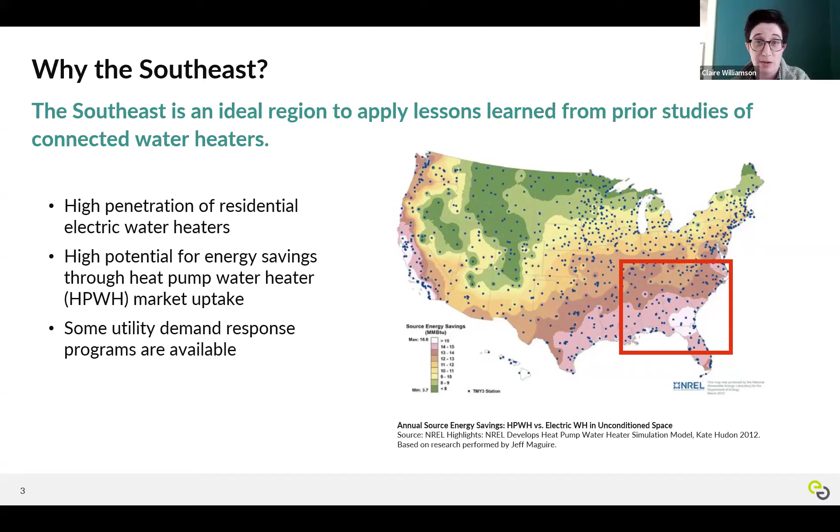Looking at demand, not just energy savings, but demand savings for heat pump water heaters, there were a couple of studies that have happened before. You can go to the next slide as well, Daniela. Really, there's two: one from 2018, where the Pacific Northwest National Laboratory did a pretty large scale connected heat pump water heater study. And then there was one in Florida as well in 2022 that did both the lab and the field testing.

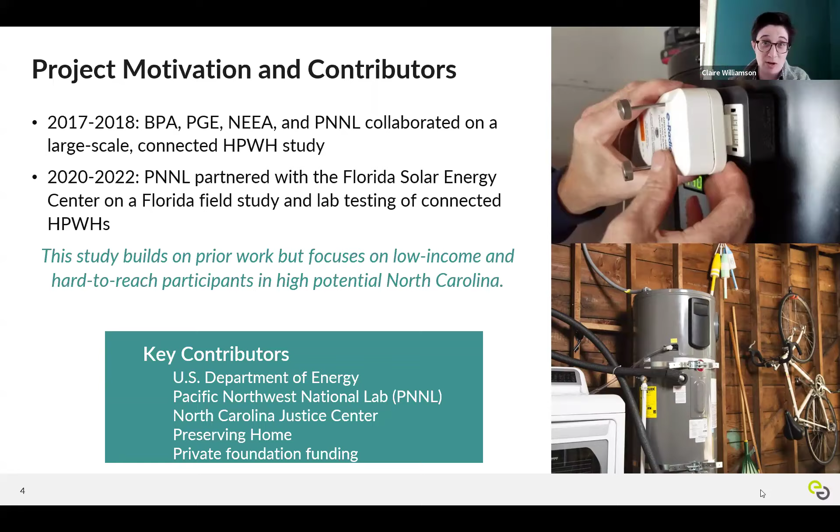And so we wanted to do field testing specifically focused on low income, harder to reach participants, to understand what are the barriers to making this, which could be a large potential of demand savings, and what would it take to have a program like that. So you can go to the next slide. The idea for this program started with my project director, Al Ripley, talking to Chris Granda, who's at Energy Solutions, years ago at a conference.

And a couple of things came together to make it possible. One factor in place is that the Justice Center had been working with a network of home repair and housing agencies in our local community in Orange County, which is in central North Carolina. And there was a great organization, and they're now called Preserving Home. At the time, they were known as Rebuilding Together of the Triangle. And they ran a collaborative where people got homes basically weatherization ready. So we had some connections for people who do that work.

Also, this program really got started during COVID, when there were some of the recovery dollars, and the state energy office in North Carolina was like, how do we spend large amounts of money fast that's going to have energy savings? They really wanted to have energy efficiency, energy savings. And we pitched them on the idea of directly paying for heat pump water heaters, like direct installs. So we got the funding for the purchase of the equipment in people's homes and could provide these heat pump water heaters to households at no cost to them. So that was really, really important.

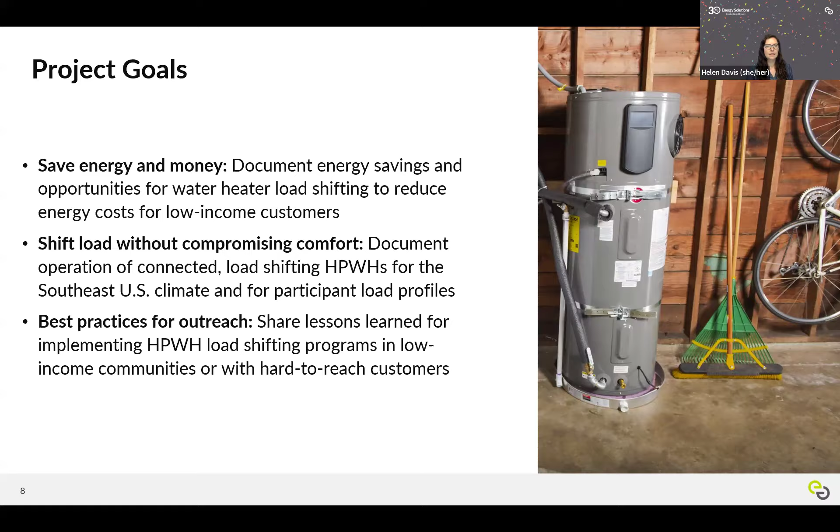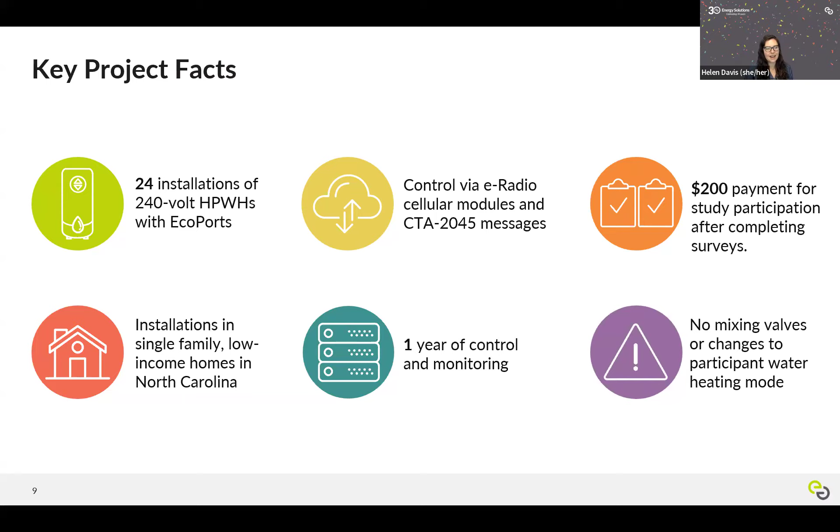So we were also surprised that about half the homes had gas water heaters prior to the study. As Claire noted, most of this area has a lot of electric water heating, so we expected more of that, but it was cool to be part of some fuel switching there. We had almost all 50-gallon tanks, one 80-gallon tank.

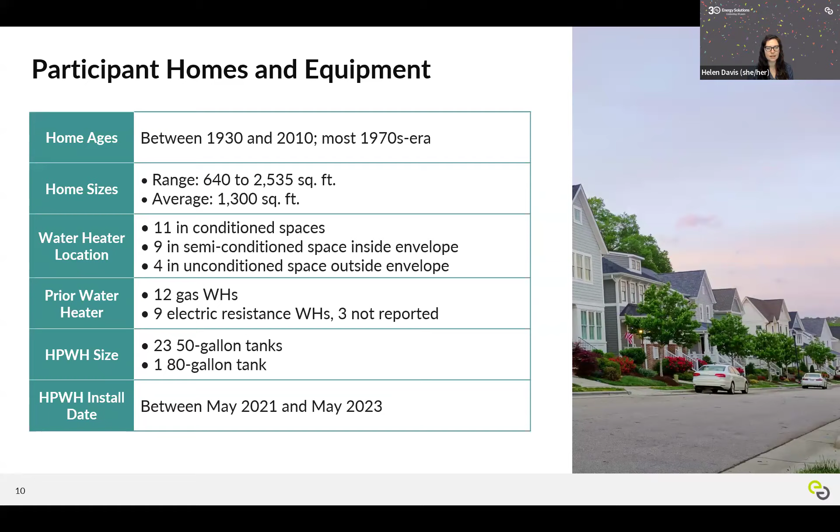And the water heaters were installed by formerly Rebuilding Together of the Triangle over a 2-year period. So from mid 2021, then we started the study in mid 2023, and some participants had just received their water heater, others had had it for a couple of years, so had seen some bill savings and that kind of thing. Next slide.

Throughout the year that we were monitoring, there were several of the homes that had a change in occupancy, which supports the need to oversize, make sure you're sizing correctly, because the occupancy can change, and increasing occupancy can really hinder the ability to load shift without impacting the hot water supply. So next slide.

So this is kind of the highlights of recruiting. This is my last slide before I'm going to hand it over to Daniela to talk about the actual data. So Preserving Home was really well known. They had provided free heat pump water heaters to this pool of folks that we reached out to participate in the study, and everyone was really happy with them. Many of the participants had seen a bill savings. So the recruiting was definitely a little easier with that warm intro, much easier than it would have been for cold calling these homes.

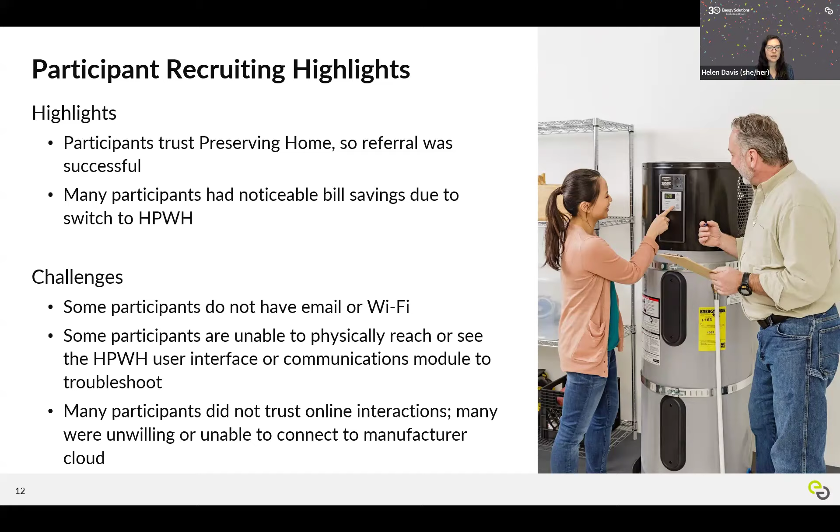And we had hoped to use the manufacturer's cloud as sort of a second check for the e-radio modules, but most participants were not willing to download the app. They didn't trust that kind of online interaction. Some of them didn't have smartphones. So we were only able to do that for a couple, and it wasn't as useful as we thought it could be. So we did learn a lot through this study about the best practices of reaching this population. Definitely mail is going to be a thing still, and it's just not as quick as it can be with the younger population that's constantly on phones and email. So Daniela is going to talk about the load shifting design and results.

Yeah, all right, thanks, Helen. Thank you. I'm gonna talk about some of the results from the study. As Helen mentioned, one of the goals was to demonstrate how the demand management features of these connected water heaters can provide additional benefits for low-income customers and the grid in the Southeast. And this would be in addition to those energy efficiency savings that customers would get from switching from a standard electric water heater, for example, to a heat pump water heater.

So this section is about how we designed the load shifting aspect of this study to achieve some of those goals and what we learned. And if you're not familiar with the term load shifting, that just means shifting a customer's energy demand or load from one part of the day to another part of the day when electricity is cheaper or when there are more electricity resources available on the grid.

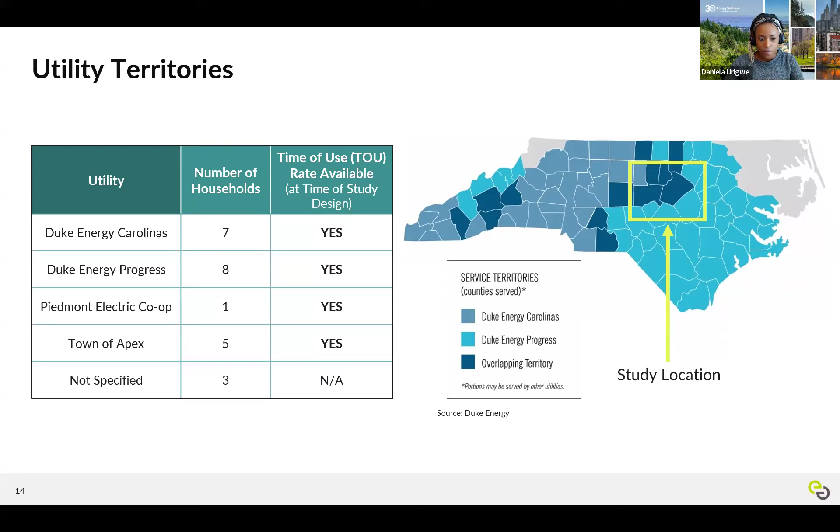And it is challenging to reduce the energy demand for such a long period of time for water heating, because that would mean that you have to hold off heating water for that time period. And if you have a lot of hot water use, you might have to recover the heating at some point in that window.

But as mentioned, the majority of our participants were seniors with only 1 to 2 occupants per household. And because of their overall small and infrequent water use, they were a little bit more flexible about when they would need to heat water compared to what other demographics would have. And they just didn't have to heat water that often, which was an interesting finding of this study. So that actually made this demographic uniquely well suited to defer their water heating for a long period of time in alignment with these peak periods.

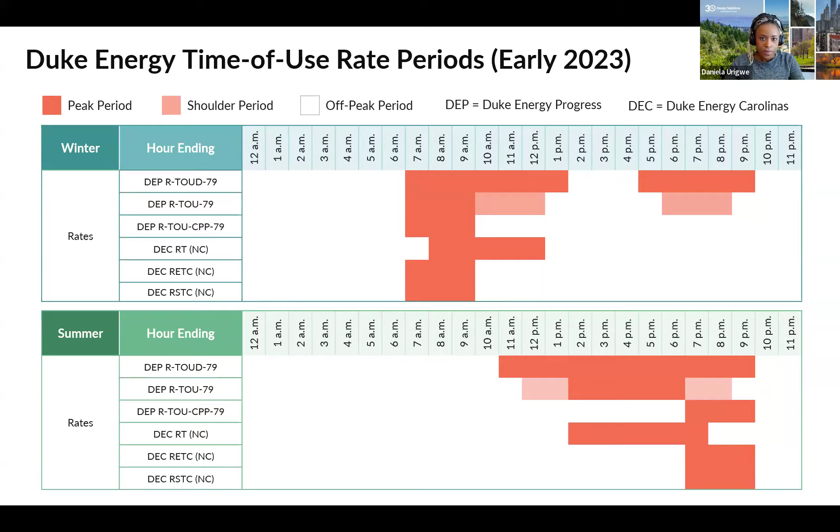And we made some simplifications as well. So for example, Duke Energy Progress and Carolinas had a slightly different definition of the summer versus winter months. We decided to use the same definitions for all of the participants to keep them all on the same schedule and collect the most robust data. So even though the participants were on some of the different rates, we kept everybody on one schedule.

So we had our summer season as May through September, and the winter season as October through April. And then we split those into cold and shoulder for the winter, hot and shoulder for the summer, to kind of differentiate the results a little more. We also used the findings from the PNNL heat pump water heater load shifting studies to inform the length of the signals, the strategies for different weather conditions, and the specific signals that were used for load shifting.

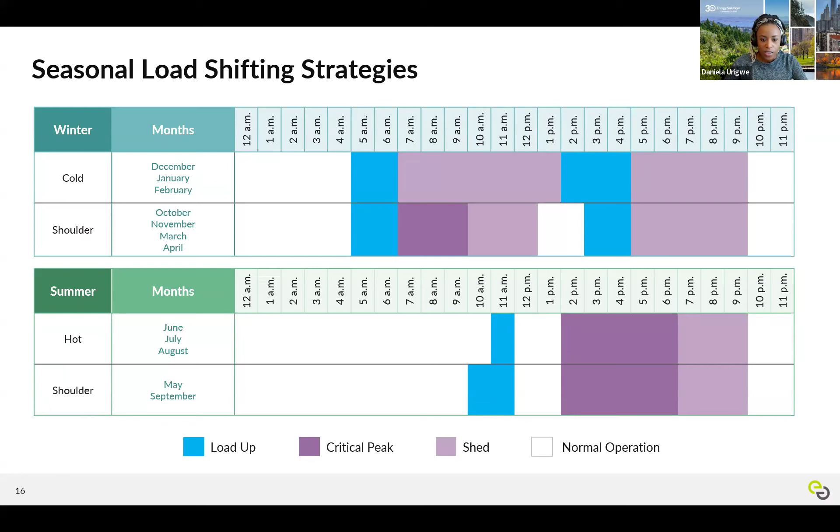So for those 4 different seasons I mentioned earlier, there are some obvious trends, like the colder it was, the more baseline energy use there was. So the colder it is, the more energy the hot water heater needs to heat the water. So therefore, because there's more baseline energy use, there's also more energy available to be shifted. Another aspect you'll see here is, like I mentioned, in the summer, we only did one long shed between 1 and 9 p.m. In the winter, we did a morning and an evening one. So there's a little bit of different results there.

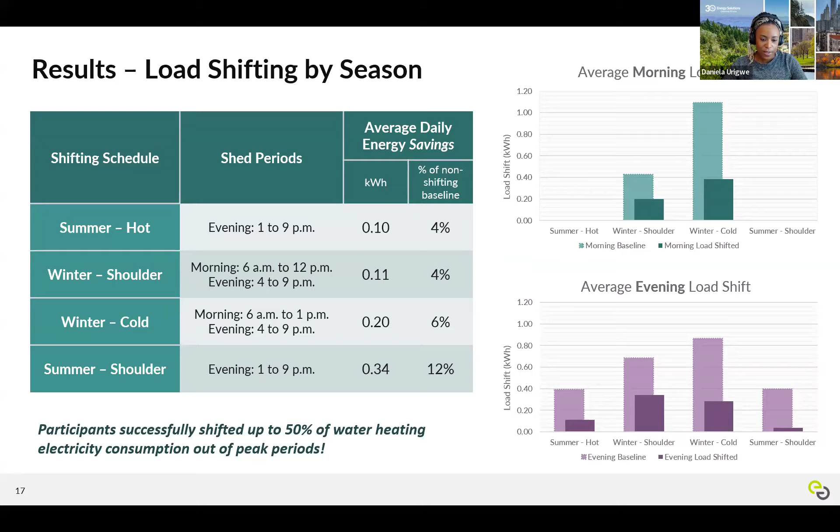As I mentioned, in the winter, we saw a lot more demand that was shifted because there's more baseline load available. So that makes sense. And another interesting finding is that there was a minor overall energy savings for these households of about an additional 4 to 12% from the load shifting. But this was a modest effect, and it wasn't a goal for the study to have additional energy savings, but it was something that we saw.

And in terms of cost savings, the electricity rates at the time we designed the study were quite low. So in the study, the off-peak rate was around 9 cents per kilowatt hour. So the cost savings were lower than they would be in a region with higher rates. We estimated an additional annual water heating electricity cost savings of around $45 from just the load shifting aspect.

So that's about a 40% additional cost savings for these customers on top of the savings that they would get from the efficiency increase from getting the new hot water heater and switching away from their old standard electric water heater. So in terms of dollar value, because electricity is cheap in this area, it's small dollar value, but it is a significant increase on just that baseline savings that they have. And in the future, as rates increase and in other areas with higher rates, the cost savings would be more significant.

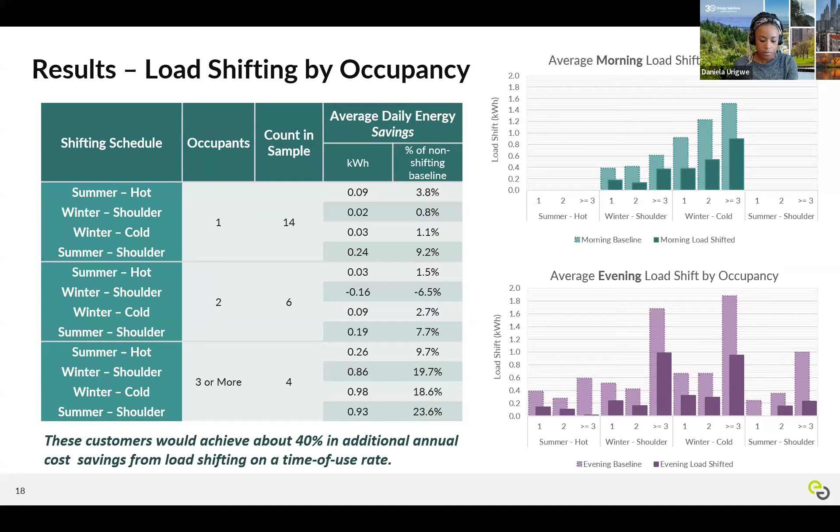And so in terms of numbers, on average, the per household daily demand reduction ranged from about 35 watts in the hot summer, when there's not a lot of demand to start with, to around 80 watts in the cold winter, when there is more load to shed. So they were basically able to defer most of their heating loads to outside of the peak periods. And then we did find that after the peak period, the water heater would recover and reheat the water once that shed was done. But that recovery was generally using the heat pump on the water heater rather than the backup electric resistance elements, which are less efficient and more expensive.

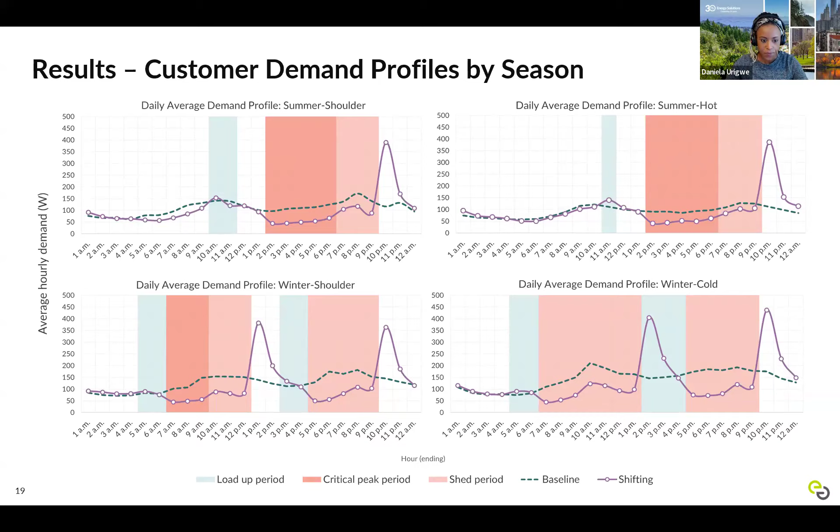And just a couple more little details about using these heat pump water heaters for load shifting. Another aspect we looked at in this study was the prevalence of the operation of the heat pump water heaters' backup electric resistance elements during the study. So these were all hybrid 240 volt heat pump water heaters. So they have electric resistance elements for heating as well as a heat pump. We didn't control the mode that the water heater operated in, as this was up to the participants, but they generally opted to operate their water heaters in hybrid mode, which can use the less efficient electric elements to heat water if needed, in addition to using the efficient heat pump most of the time.

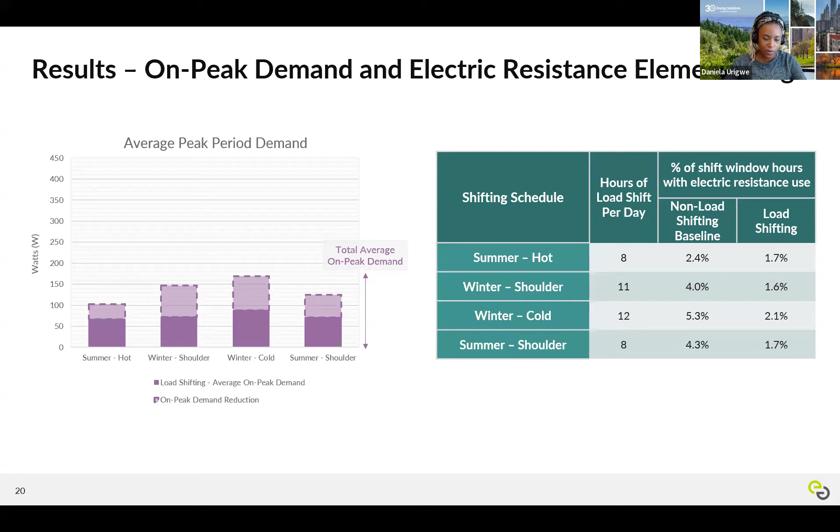But when we were doing the load shifting, it reduced how often those elements were operating by 30 to 60%, depending on the season. So it reduced that operation down to around 1.5 to 2% at most of the time. So this is another benefit that we saw of the load shifting.

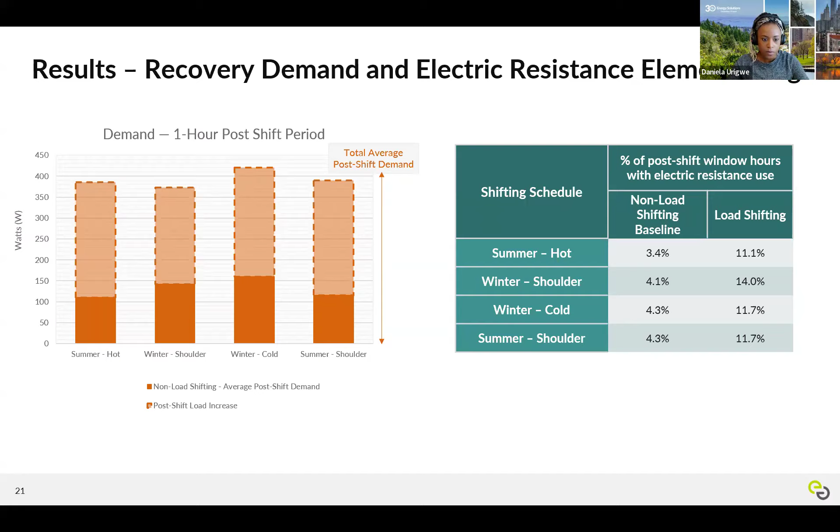So finally, I'm going to talk about the kind of last thing we looked at in this study. So we looked at a demand response event. And so that's an event to reduce demand on the grid during a peak day. So we scheduled the demand response event to coincide with the coldest winter day in the study to simulate a grid peak day, because we wanted to demonstrate the ability of these water heaters to reduce demand on the grid to support the North Carolina grid during the system peak periods.

So our test demand response event was conducted from 6 to 9 a.m. on January 17th, 2024, on a day where the temperature was about 20 degrees Fahrenheit. And for the demand response event, we used a 2-hour load up period followed by a 3-hour critical peak event. And that is a more aggressive strategy than we use on the regular cold winter days, because we wanted to see what the maximum amount of load reduction we could get from these units was on a grid peak day.

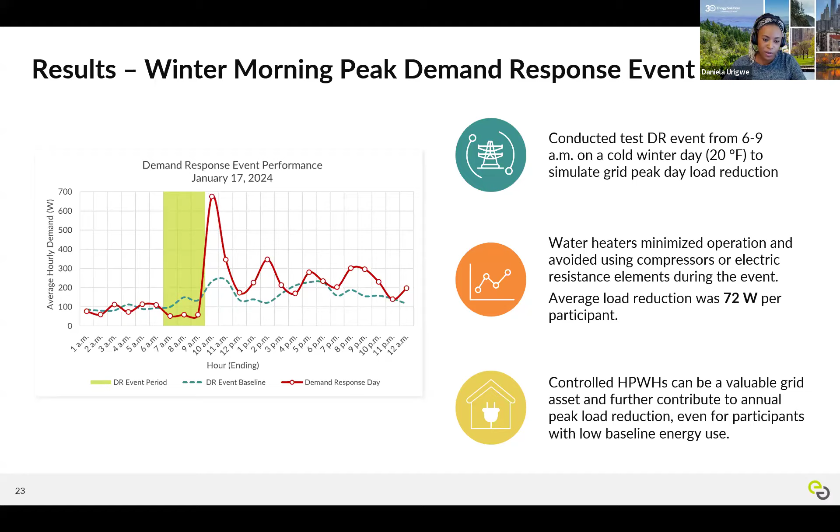And I just want to talk about some of the kind of future opportunities in this region. So as I touched on earlier, the time of use rates we used in the study had these really long peak periods. So we were doing the load shifting for around 6 to 8 hours, depending on the season, which is a really long time, and it could be hard to do depending on a customer's hot water usage profile.

In this case, we were able to do these long load shifts because the study households had low occupancy and low hot water usage in general. But for other households that have higher hot water demands, it might not be as easy to do. But since this study was completed, Duke Energy has come out with new time of use rates that have different season months, shorter peak periods, and also lower price discount periods.

And these new rates, especially with the shorter peak periods, could make load shifting easier for customers to do. And so we would expect that the performance of this load shifting would increase if we were to look at it using these new rates.

The other thing is that these rates have these low price discount periods that are even lower price than the off-peak period. So if the customers are able to shift their energy usage to those periods, they could save even more than what we were able to find in this study. So this presents a really good opportunity in this region for the future for this kind of work to continue, but to have even stronger results.

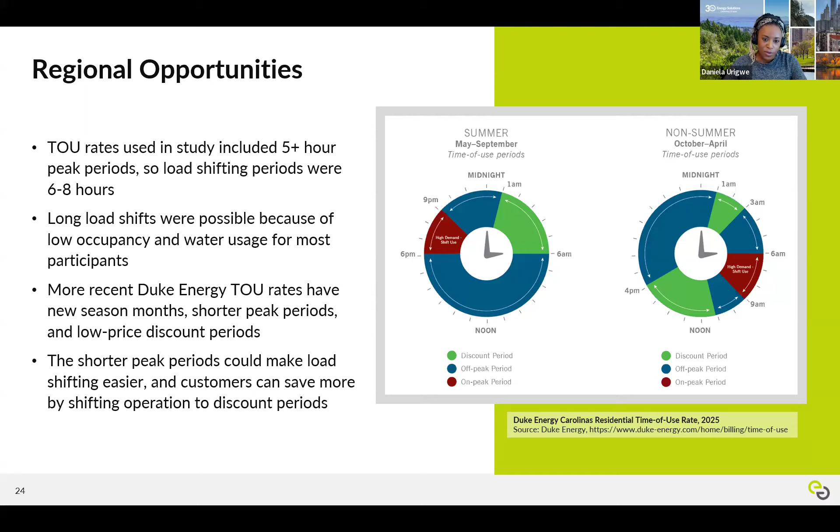So I'm going to move on to some conclusions and recommendations. And, knowing that residential electric water heating is a significant contributor of peak electricity demand in North Carolina and in the Southeast, through this project, we showed that it was possible to shift a lot of that load off peak, which could result in notable peak load reduction at scale, which is great.

And this load shifting is made possible by these newer heat pump water heaters that have these integrated connectivity features, and they can be used to provide some of these financial benefits for households, including low-income households and low occupancy households. And the financial benefits would be even greater for households with more usage or in areas with higher rates.

So, in conclusion, some of the lessons we learned from this project were that connected heat pump water heaters can reduce electricity costs for households in the Southeast that have access to these time varying rates. They can reduce costs for low income households. And this technology can be leveraged to shift that electricity use off peak without any input from users on a day to day basis. And this technology can also reduce demand during the grid peak days, such as on cold winter days. It can be done without customer intervention, without causing cold water events, which is great.

And an interesting finding was that the seniors in the low occupancy homes in this study with the low hot water usage were particularly flexible for load shifting. So this could point to future opportunities with other untapped demographics that haven't really been the main participants in prior kind of programs. And finally, we showed how engaging low income and hard to reach households can be successful when the programs are designed to respond to their needs.

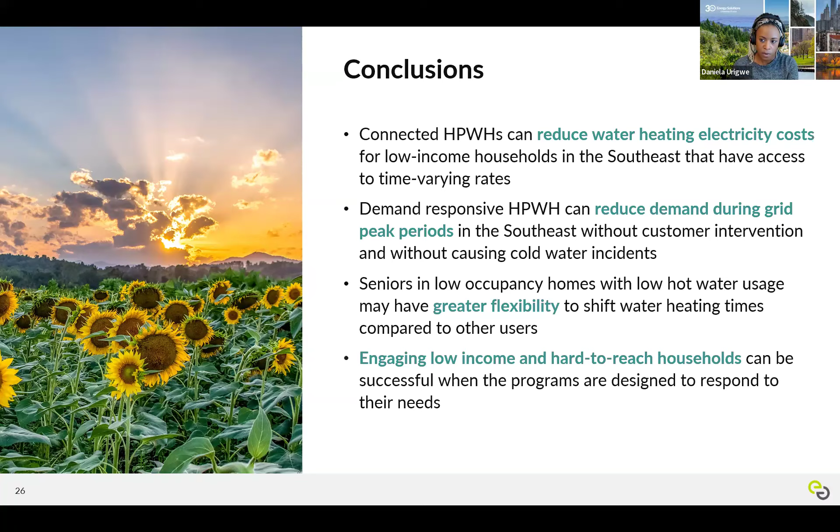So we have some recommendations, some takeaways that we wanted to share from this study. We learned a lot about how to engage hard to reach customers and water heater load shifting or demand response programs. So these recommendations would help make future similar programs more accessible and relevant to all types of customers. And it would be a win-win scenario to have these devices contributing to grid needs while also providing cost savings for low income and energy burden customers, especially in the Southeast US where there's so much potential for this technology.

So some of the recommendations for customers are to make sure they're educated on time of use rates and so they know how to minimize their costs by taking advantage of those. And then for installations, it's important to upsize the water heater units to ensure that there's enough hot water for especially multi-generational homes or homes that have variable occupancy, which is something we saw in this study. A lot of folks would have people moving in and out of their homes.

For programs, an important lesson is to partner with trusted channels to reach hard to reach customers. So in this case, partnering with Preserving Home was so beneficial. Another recommendation is to target offerings based on customer demographics. So low hot water users, like the seniors in our study, might be more flexible. They could have a targeted offering, perhaps, or other demographics could have offerings targeted to them. And then finally, a really important finding was that it's really important to include enrollment and support options that don't require internet access or email.